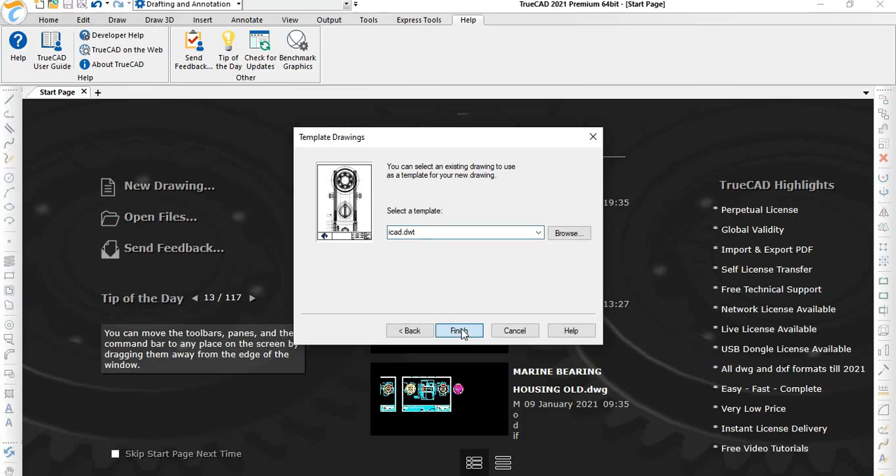This is our interface: the command bar, the status bar, the tool palettes, and the right click options.

We have two interfaces, ribbon and classic. By using this feature, you can switch the workspace to ribbon and classic.

The file formats which we support for opening files are .dwg, .dxf, .dxb, DWF, DWT, DGN, DGNlib, RDL, CEL, DJE, etc.

The file formats which we support for saving files are DWG, DXF, and DWT. Wherein DXF has two file formats, ASCII and binary.

The ASCII is to save the file and open the file in any other software to work, while for binary, you can only open the file in any other software but are not able to work, and it is for read-only purpose.

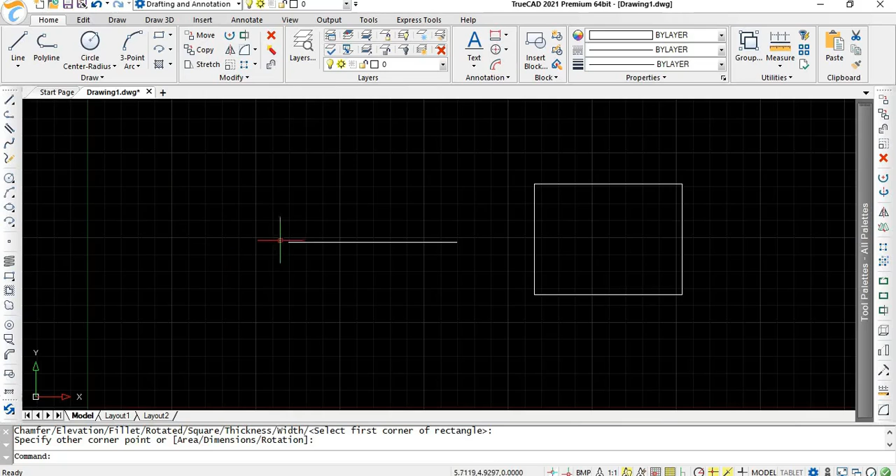Hatch command. Hatch command is used to fill the enclosed areas or specified entities with a hatch pattern. You can select either from the icon or press H on the command bar.

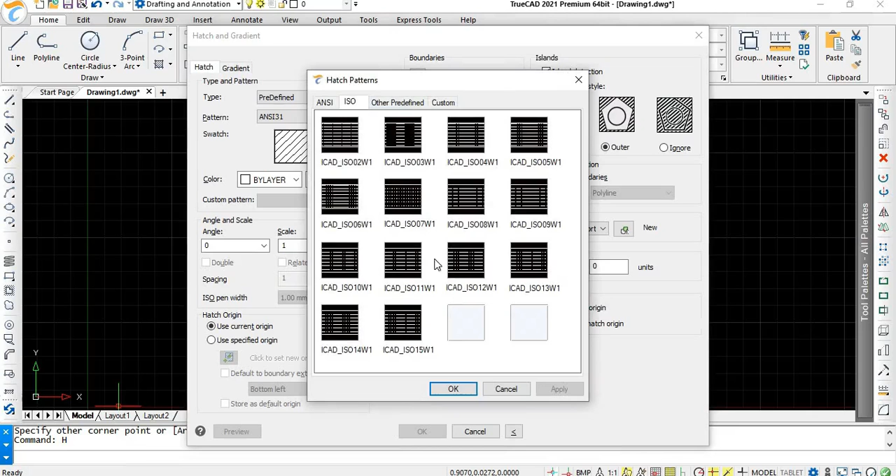In the hatch dialog box, we have different types of patterns like ANSI, ISO, other predefined, etc. After modifying all the required values like color, angle and scale, you can create a hatch either by picking

the internal points or by selecting the entities. After picking the internal point, check the preview and click OK. Hatching adds a meaning to the drawing and it also helps to differentiate the materials and areas.

Print. This is our print dialog box where you can add page setup for the printer by providing a name and clicking on OK. Select the printer you want and you can modify the printer properties like paper size, resolution, orientation,

etc. with the default page setup by using these properties. These are the inbuilt print styles which are available in our software and you can add your own print styles by clicking on new.

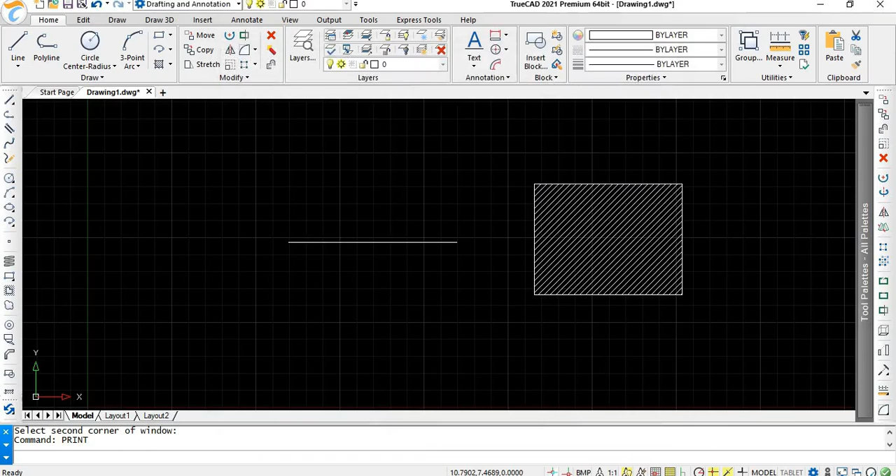Create a new print style from scratch or by using an existing print style table and click on next. Browse the print styles you want and click on open to add the print style to the software. Select the print area and click on preview to check, then click on print.

Draw 3D. Here we have provided 3D meshes in the facet model meshes. You can draw the box, wedge, pyramid, cone, cylinder, sphere, torus, etc. in the meshes as well as the facet models. You can also perform operations like union, subtract, intersect, revolve, extrude, 3D convert for the facet model meshes.

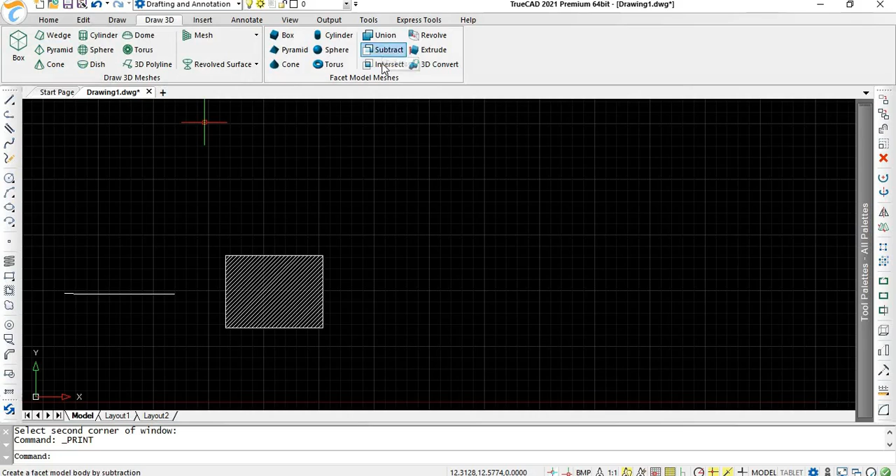Insert menu. Define attributes. By using this, you can create an attribute of different styles with different heights and click on OK.

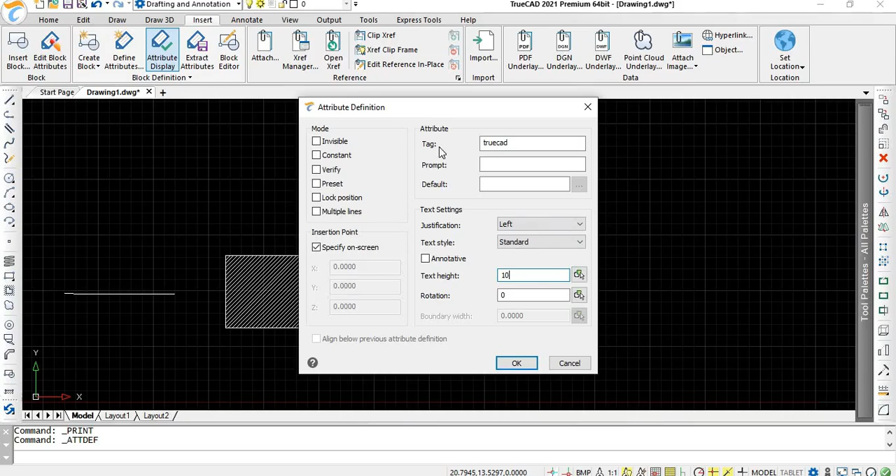Now create the block and enter the name of the block, then click on OK. Now select the entities and press enter. Then the block with the specified name was created.

Insert block. You can insert the block by block name or from the file and click on insert. Now specify the insertion point, the rotation angle for the block, the scale factor and the attribute value and click enter.

You can also insert the block from the file. Browse the file you want, click on open and click on insert. Now specify the insertion point, scale factor and the rotation angle for the block. Now the block from the file was created.

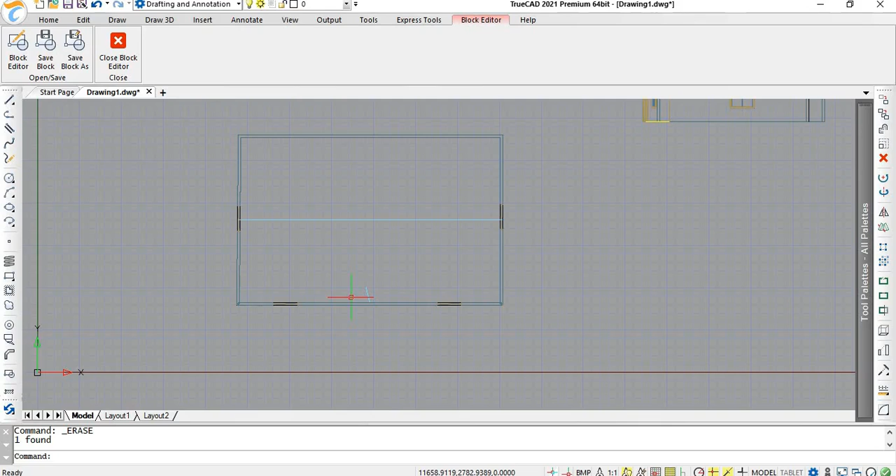After modifying the block, save it and close the block editor.

XRef Manager. Click on XRef Manager and the dialog box appears. Click on Attach, select the file and click on Open. Then in the dialog box, select the reference type, either as an attachment or an overlay, and click OK. Then specify the insertion point, X, Y scale factor, and the rotation angle.

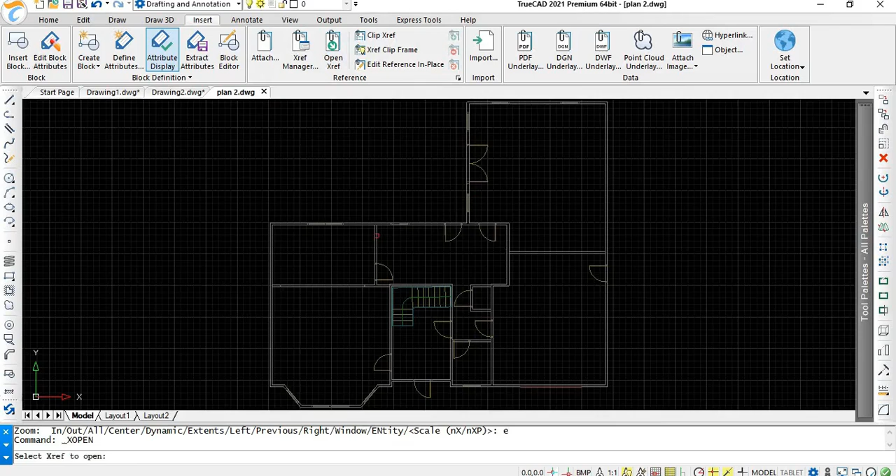Now you can see the attached XRef on the interface. Open XRef. Click on Open XRef and select the XRef to open. Then the XRef can be edited in place by using the edit reference in place feature.

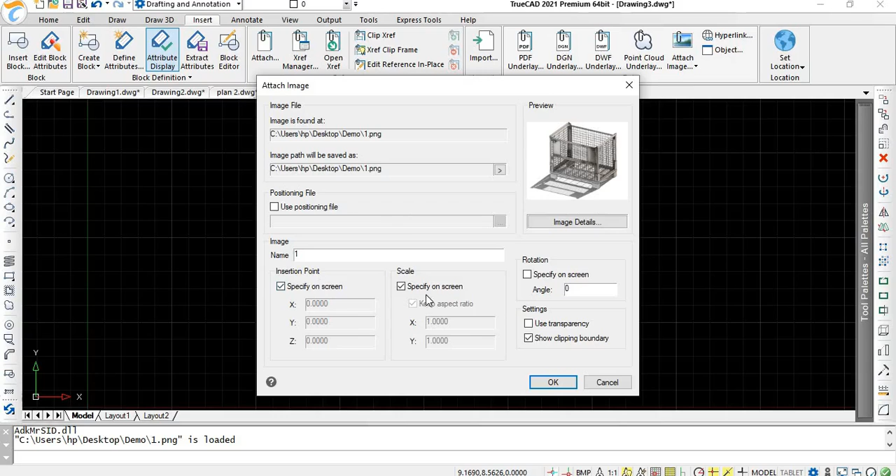Attach Image. By using this feature, you can attach an image on the interface. Select the image you want and click on Open. Now you can select settings like the insertion point and click on OK. Specify the insertion point and the scale to insert the image.

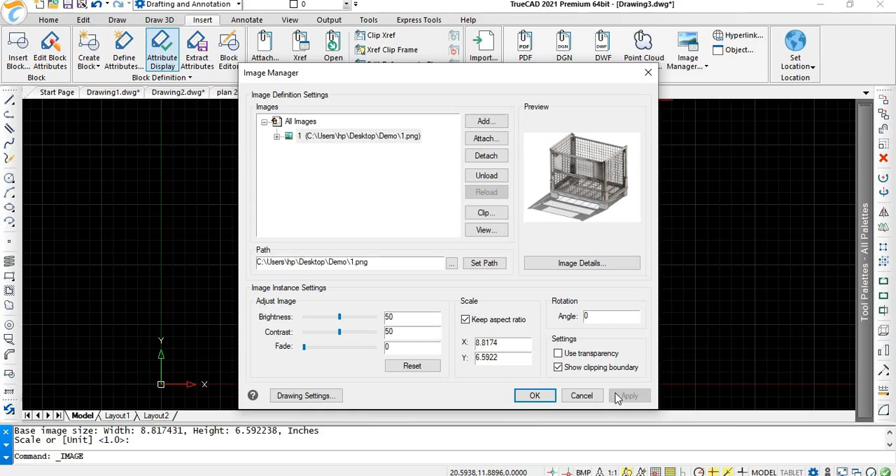In the Image Manager, you can modify the instances of an image like brightness, contrast, and aspect ratio. After modifying all the values, click on Apply and click OK. Now you can see the image with the modified settings.

OLE. Click on Object and you can create a new file. Browse the file you want and click on Open. If you want to enable that file as a link, you can enable this feature, or else just click on OK. Now the CSV file is inserted into the drawing.

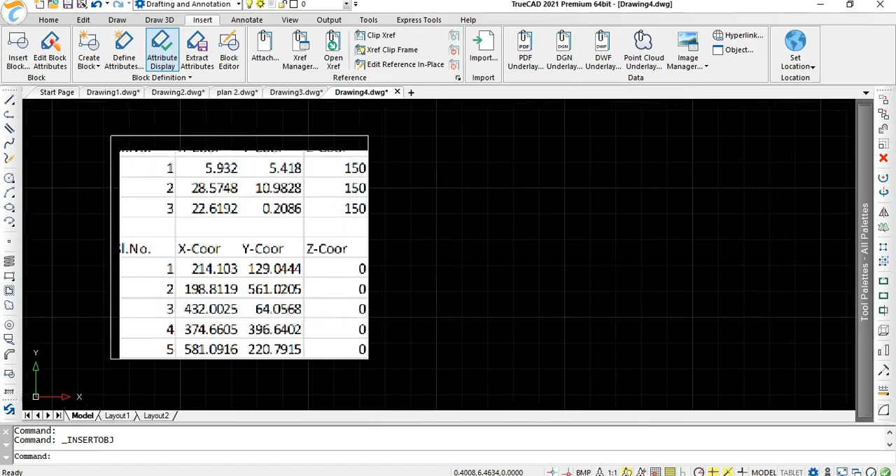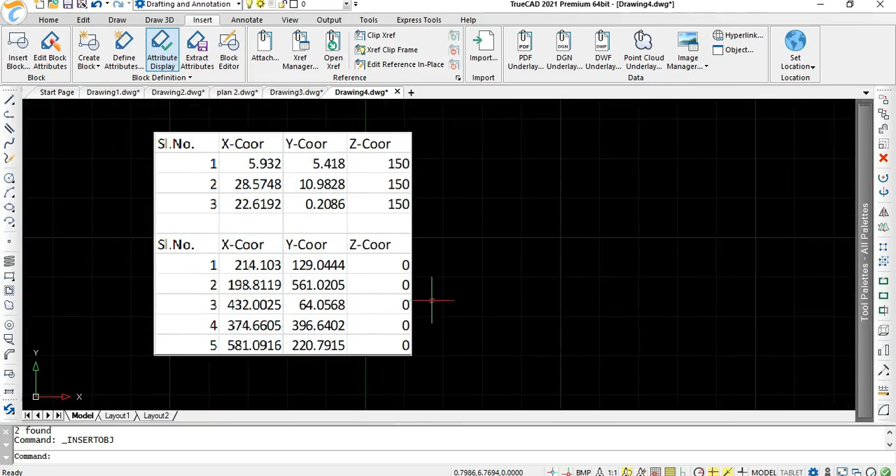If you want to insert the CSV file as a link, browse the file you want, enable the link feature, and click on OK. Whenever you insert the object as a link in the software, if you double click on that object, it will lead directly to the CSV file.

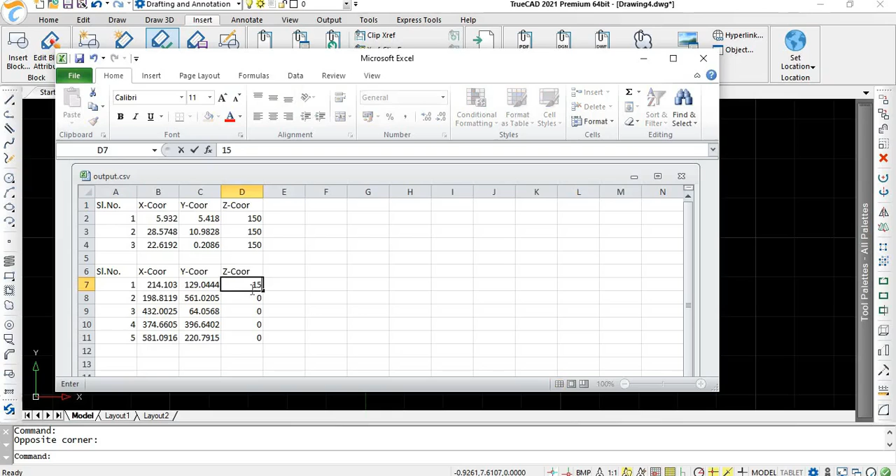If you do modifications in this CSV file, after doing the modifications, click on Save. Now the changes will be displayed in the interface directly.

Annotate menu. Text Styles Manager. The Text Styles Manager dialog box provides the current style name details, and if you want to create a new text style, click on New, type the style name, and click on OK.

Now the text style will be created. If you want to rename the text style, click on Rename, and if you want to delete it, click on Delete.

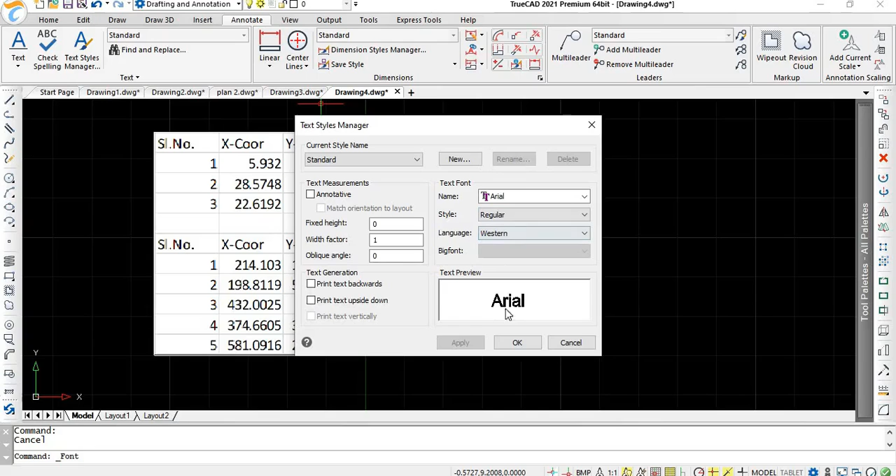Here you can adjust settings like the fixed height, width, oblique angle, text font styles, language, etc. After modifying all the values, click on Apply and click OK.

Dimension Styles Manager. Here you can add your own dimension styles or modify existing ones. Click on Modify, and here you can change the color, line type, line weight, baseline spacing, etc. of the lines. In Symbols and Arrows, we have different symbols for the starting arrowhead, the leader arrowhead, the tick marks, etc.

You can change settings of the text like style, color, background, text height, and the placement of the text in the dimension, etc. using this feature. Fit.

Primary Units. Here you can change the units of the dimensions like decimal, engineering, architectural, fractional, etc., with a specific round off, decimal separator, and precision factor. After modifying all the values, click on OK.

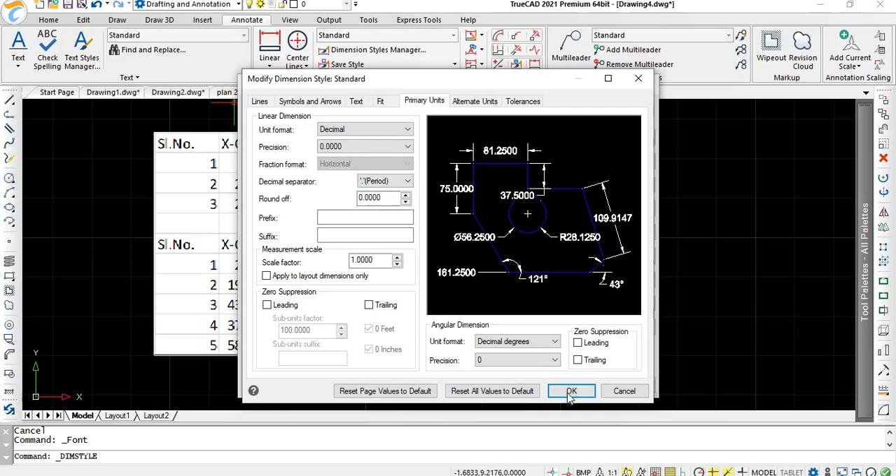View menu. Here we have geometrical views like top, right side, aerial right front, aerial left front, etc.

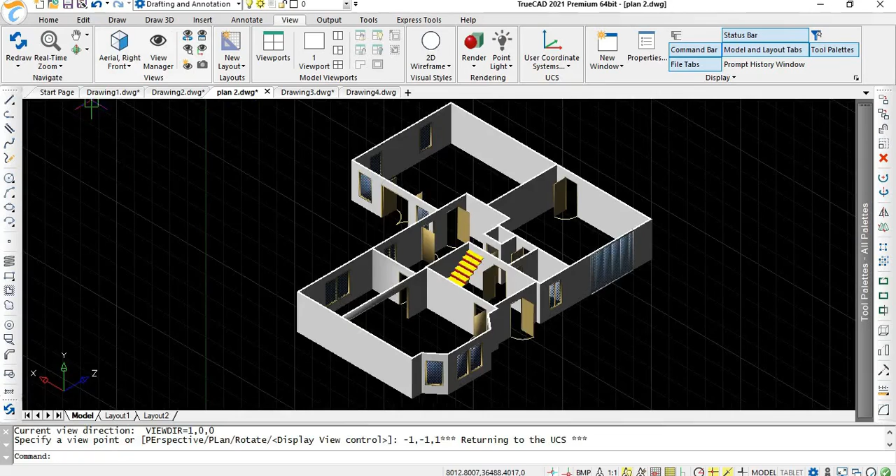We also have visual styles like 3D wireframe, 2D wireframe, conceptual, realistic, etc.

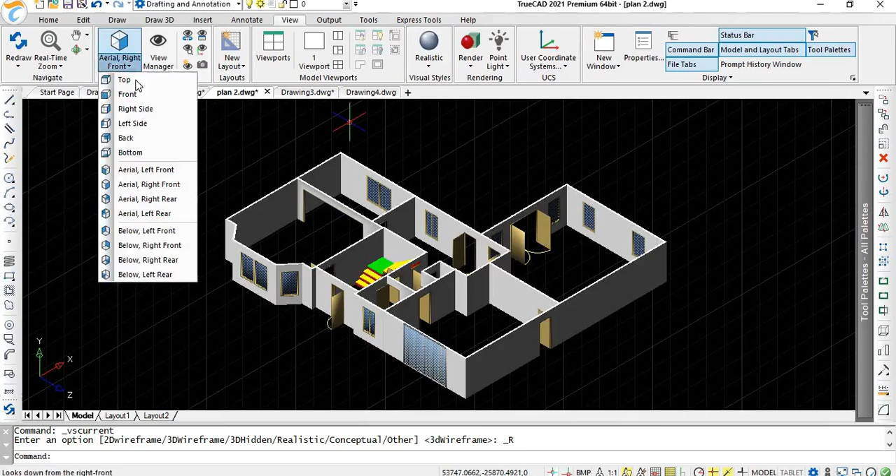Publish. By using this feature, you can publish the drawings to PDF, DWF, and DWFX. After selecting the required format, you can change the settings of the publish by using these publish options.

Along with the 2D PDF, you also have the 3D PDF publish option. After modifying all the settings, click on Publish.

By using the Page Setup Manager, you can add or modify the page for the default printer.

Tools menu. Options. By using Options, you can change settings like enabling the autosave feature, entering the frequency of autosave in minutes, and typing the file extension for autosaved files.

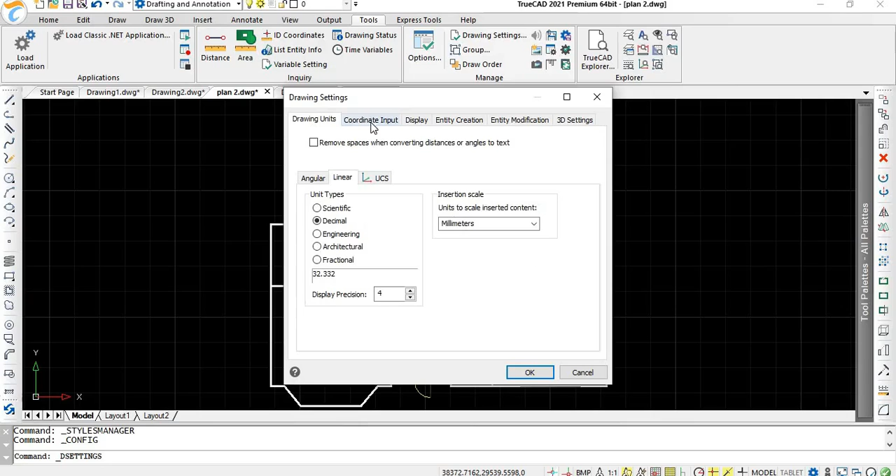Drawing Settings. By using this feature, you can change settings for units for angular and linear measurements, coordinate input display, entity creation, entity modification, and 3D settings using this Drawing Settings dialog box.

TrueCAD Explorer. This feature helps provide the drawing in a brief way with different categories like layers, layer states, line types, text styles, dimension styles, etc.

If you want to do modifications of any one of these types, simply double click on that particular type, then it displays the dialog box where you can do the modifications directly.

For example, if you want to change the color and line type of a particular layer, simply double click on the layers, and in the Layer dialog box, you can change the color and line type of different layers as required.

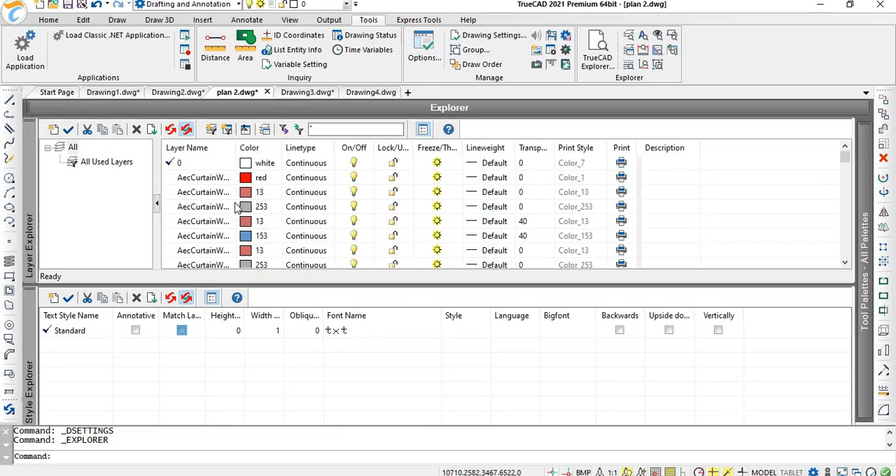Help menu. In the Help menu, we have the TrueCAD User Guide, which provides information about all the commands present in the software in a PDF file format around 800 pages with detailed information about all the commands for easy understanding.

When you click on TrueCAD on the Web, it leads to our website where you can find the features and complete information about our software. We also provide video tutorials along with the support system.

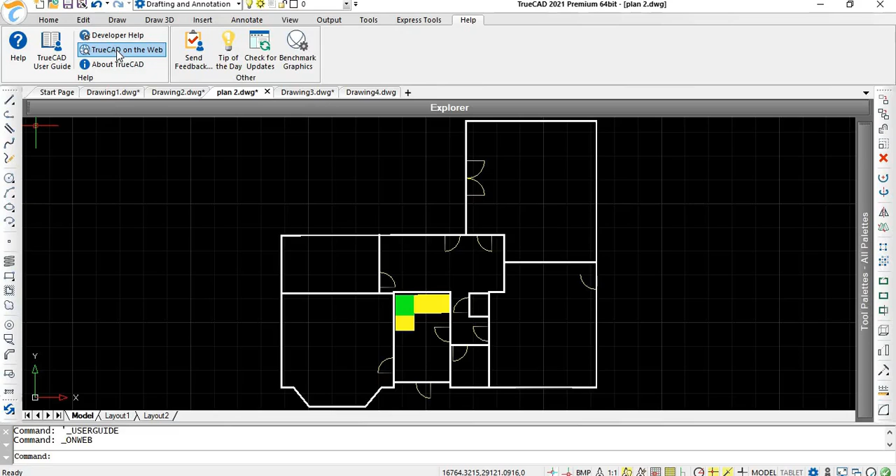Check for Updates. By using this feature, you can download the latest update of our software.